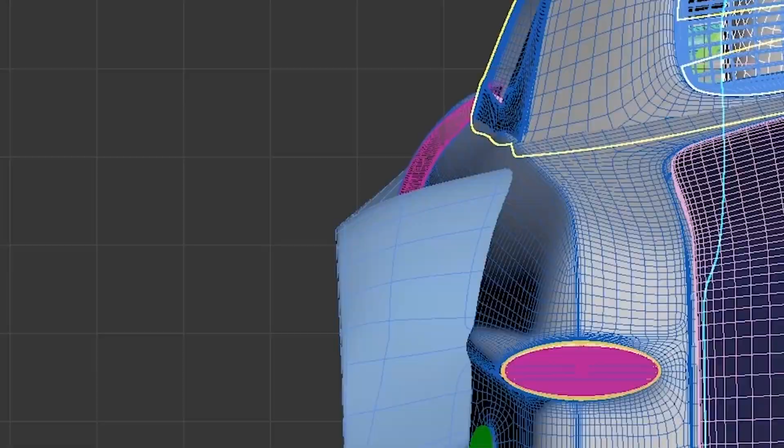All right, we're not gonna work on that one today though. Hi guys, so what's up everybody? We went out and drove this thing yesterday, and it's really running pretty good for the first time ever. Not perfect, but pretty good.

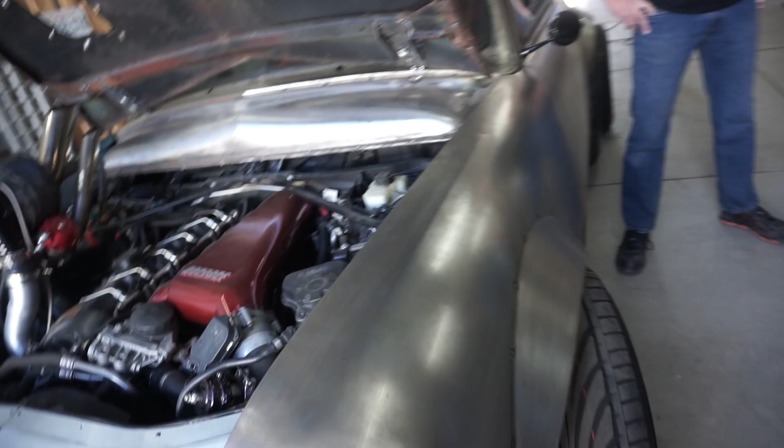What happened though, when I was driving, I finally figured out why the car is so rough. It's loud because it's still bare metal inside, right? Come over here and push down on this right now—we got zero travel on this front suspension. So what I figured out is that our coilovers are cranked all the way down on the front, because we're working through so many other things.

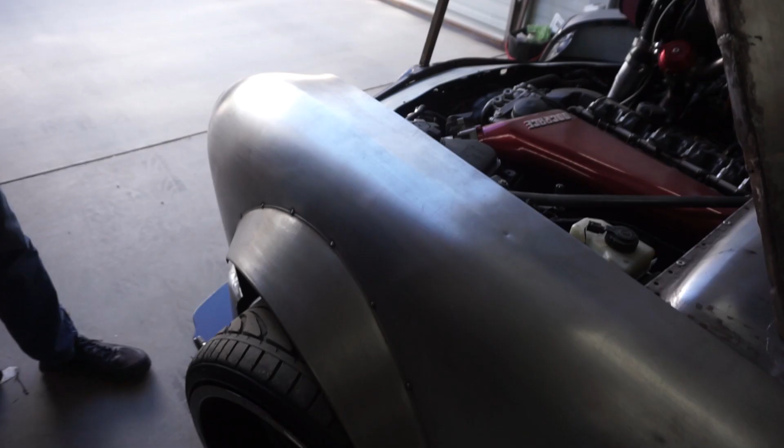Man, that's really dark. I don't know how it's gonna work either because this is not my wide angle. Is this my wide angle? Looks like yours. Yeah, this is my wide angle. Where's your wide angle?

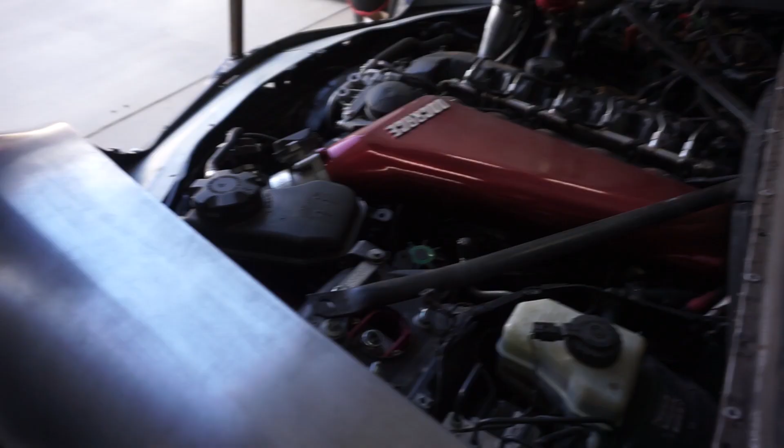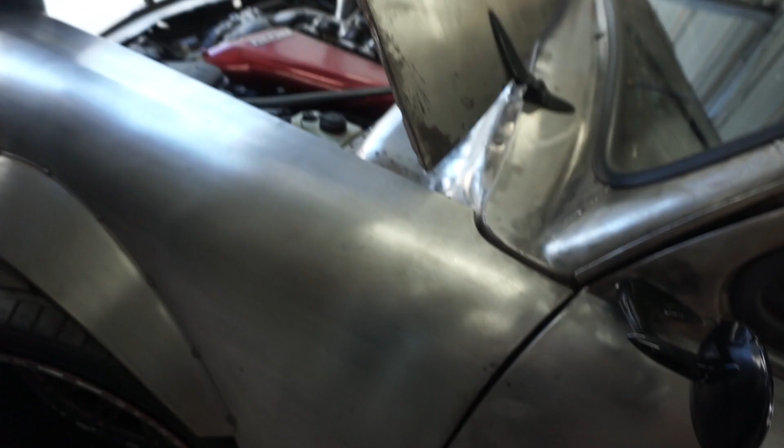I think a few things today—maybe we should tackle that. Unfortunately, the thing to do would be to cut the shock tower and raise it 1 inch, probably maybe 2, and then crank our coils accordingly, and that'll give us our travel back. That's also a way to lower a car more, but we're not really needing to go lower. What it does is you actually lift the coil 1 inch and lift the shock tower 1 inch, and you're still at the same ride height, but now you've got 1 inch of travel. Y'all following? That's pretty cool, actually.

I've done this before on an Astro van where we needed to get it lower and there was just no other way to get it lower, and we were able to do some stuff like this. What will we do after lunch?

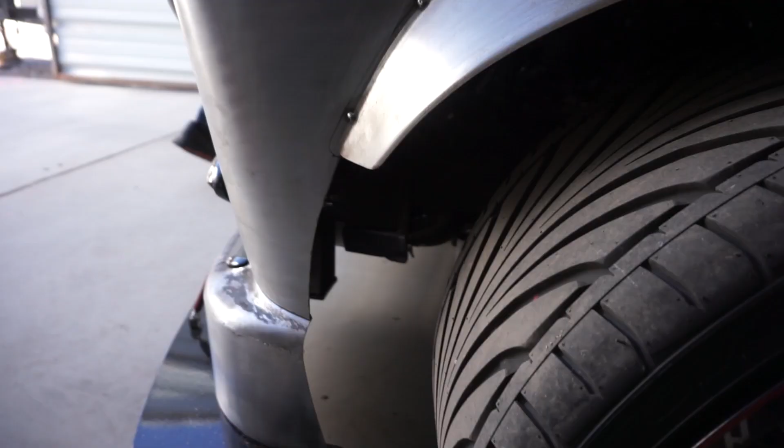All right, and then the other stuff is we finished the rear wheel arch lips, or whatever, the supports. I think we need to work on the front ones now to put the L's in, and I think Ryan's like the pro at that—he can stretch and bend metal like the man of steel that he is. Yeah, so I think we can maybe do that.

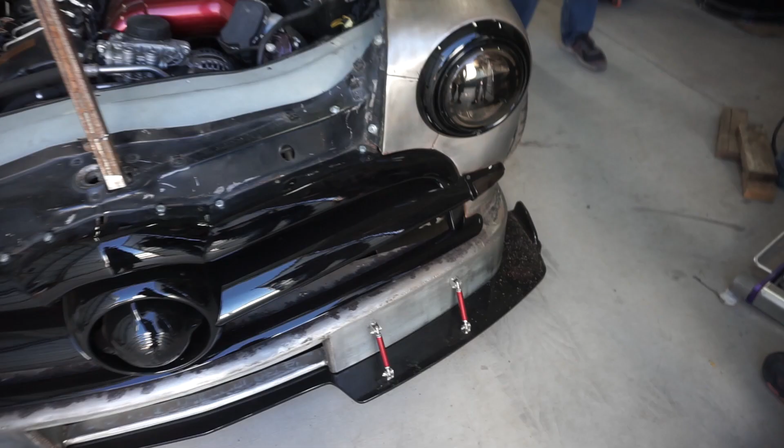Look at the dirt it throws up on the thing. That's crazy. So you borrowed this steering wheel.

I did borrow that steering wheel off your daily driver. Yeah, so I was having an airbag fault, and it's a 2-plug connection, stage 1, stage 2 on the airbag. One of my harnesses was giving me a fault, so I kind of borrowed the other harness out of that one. Oh wait, I thought you gave me the good one, so this is all good and yours is all bad? That's not the case—actually, I have the good harness now. All right, well, and yours is no good.

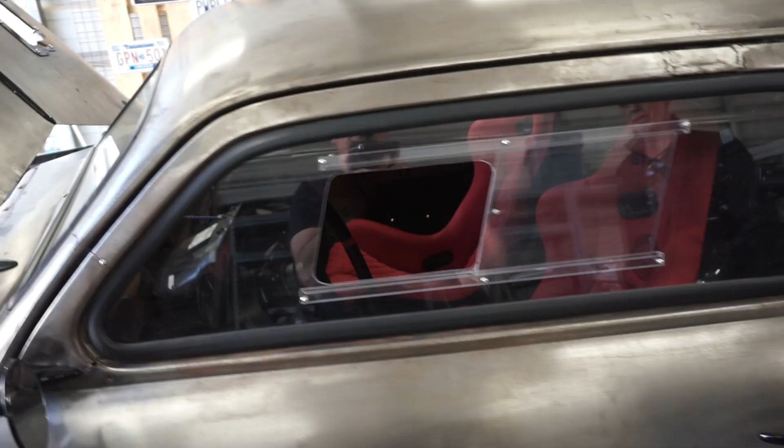I'm just joking. This was our old steering wheel that came off the car. We were never going to use it, except that we're having some weird things going on with the shifting on this—it just doesn't want to go into sport shift. I'm thinking that maybe it's looking for the paddles and doesn't see them. So we're going to try to do that at some point too, but probably not today.

So just trying to kind of figure out how that thing looks. Just from looking at it like this, it almost looks like there's a straight spot here, but once you actually put something up against it, it's pretty rounded. I think they might be able to grind just a little bit of the tip off. But I was more curious to see, since it's been so long that we did this, how do we draw it on there? I want to make sure that it transfers from left to right.

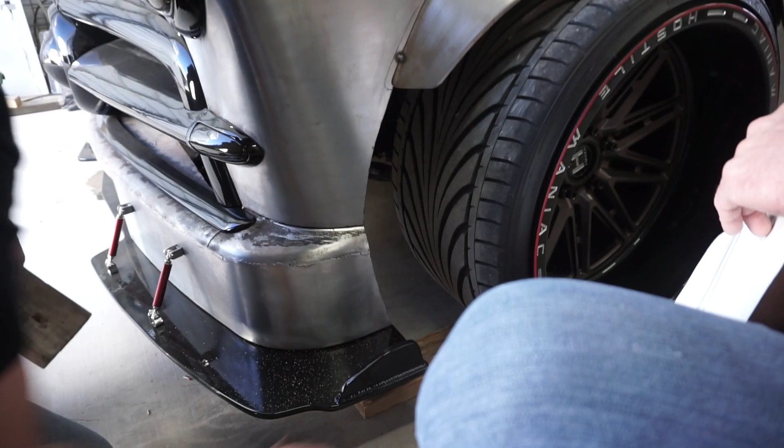What we did on the back is we took the one that was on one side, made it to match, and then basically made the other side. Over here, I think I'd like to explore the option like what you did on the back.

Yeah, we talked about the little triangle, even though this cuts in because of the clearance. There's a lot of room, so I think we can come down here and roll under. Almost need to come in a little bit here just to get the arch.

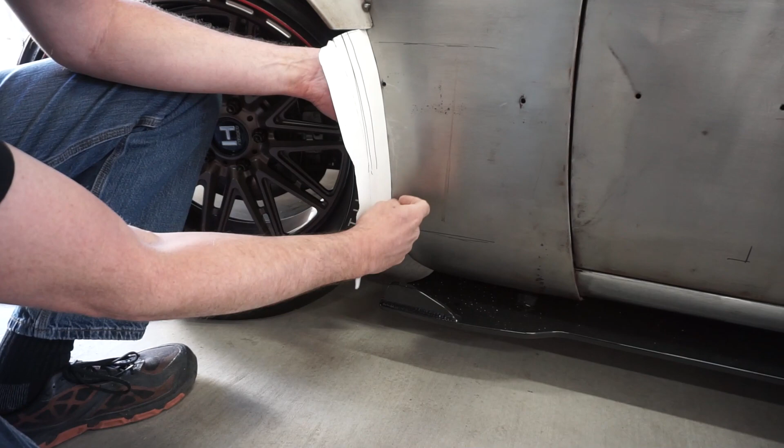You mean it's a little flat right now? Yeah, it's a little flat. When you look at that, it's almost vertical right here. Trim off where this rolls underneath. We can do the little corner flat plate like we did for the back.

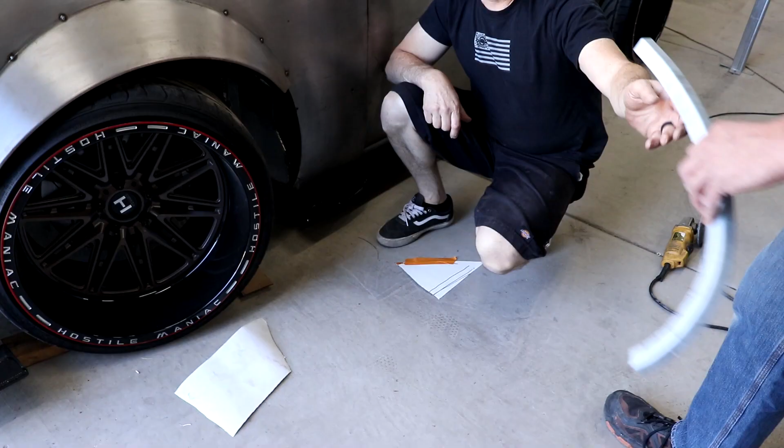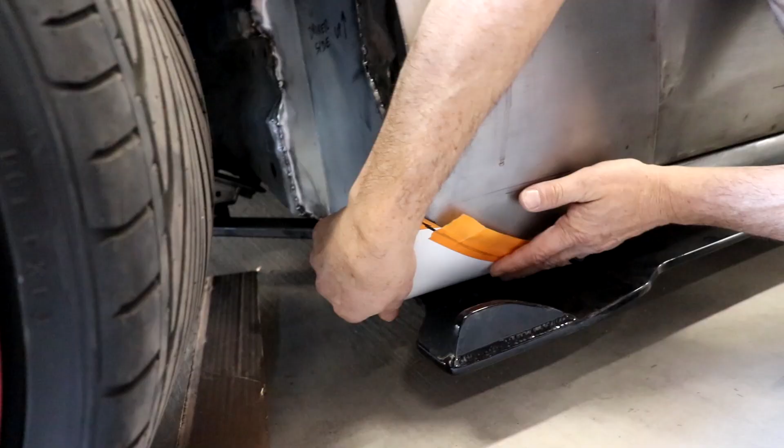What we're gonna make is a piece like this. Oh, we already made it, but that's okay, you guys can go back in time and look at it. So this piece is gonna end up going in here, and it gets welded in, and that's what gives this thing strength. This is gonna be a piece of sheet metal that gets welded on, and that roll is gonna get cut off behind it. So now it creates this really cool visual line that actually returns back the other way. I think it's just really kind of futuristic.

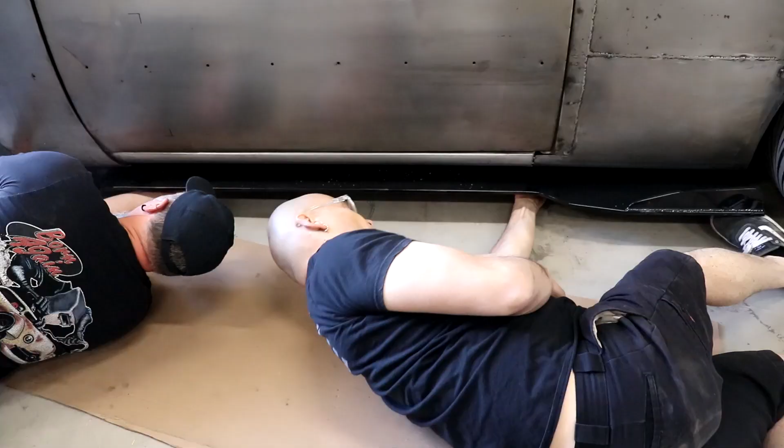We're gonna weld a piece in here, weld that L in here, that's radius, and that's what we're gonna work on today. We're gonna have to drop the side skirt out of the way so we don't hurt it when we do some more cutting there and eventually start welding. I really hate taking it off and back on, and just want to get this car clear coated already and leave these things on, but there's still a lot of welding here we haven't tackled yet.

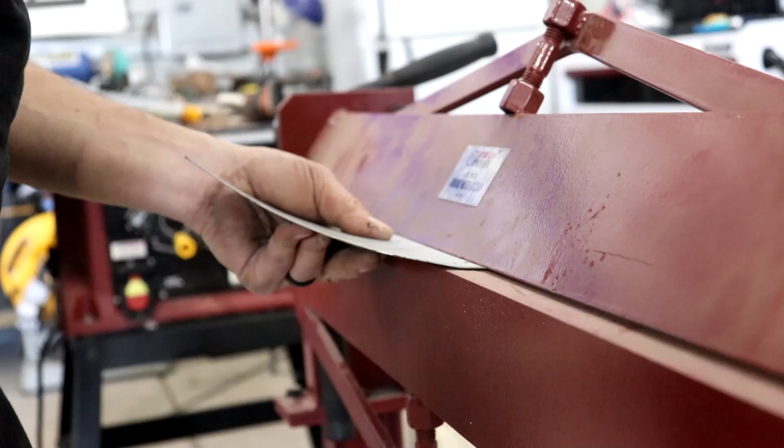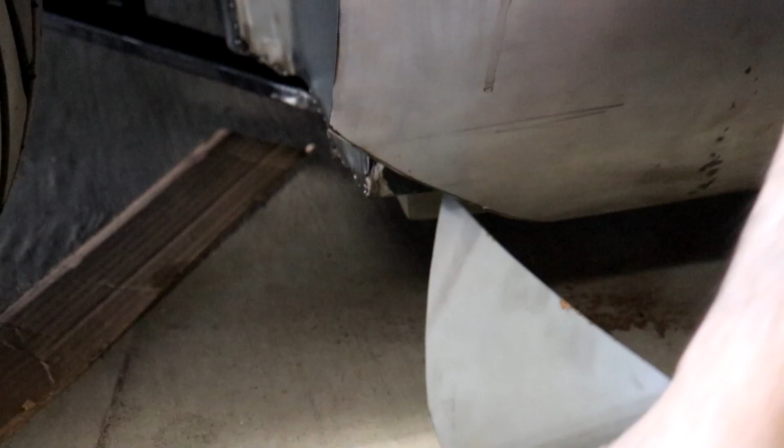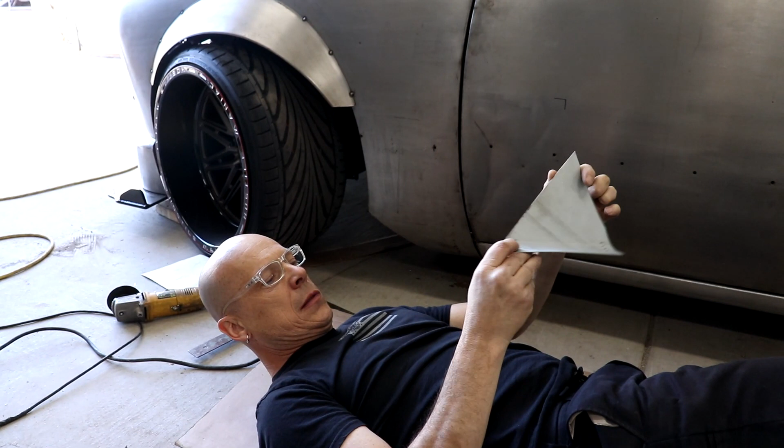Maybe a little flatter here. It's actually working pretty well, pretty good. So just use your hand, use the brake there, a little mallet action to soften it up, and we got our piece.

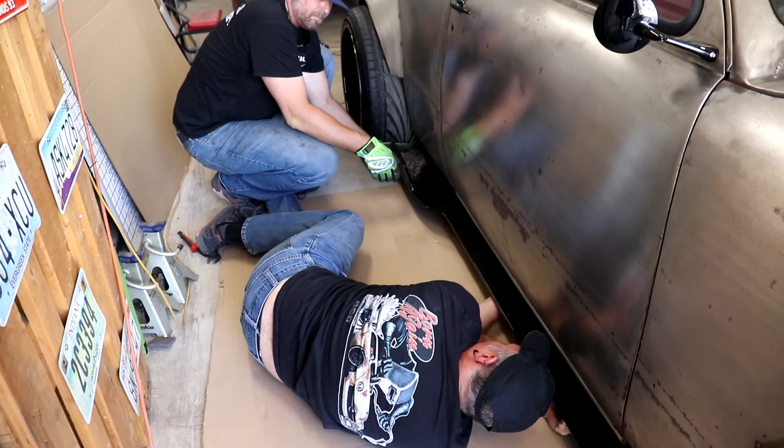Makes it difficult to craft. Man, you're really making this difficult. Yeah, dude, I've never had problems with this truck. Alright, I'll take it. You just set the other one on the trailer. Did he? Yeah. No.

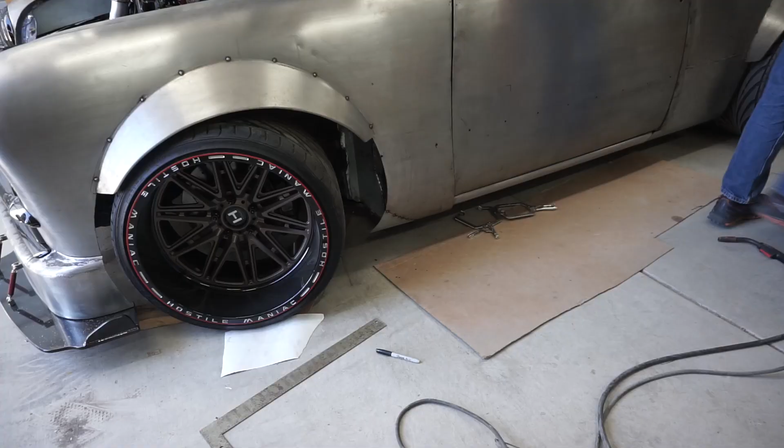So we got quite a bit done with the guys, but everyone had to leave, so we kind of stopped doing that fabrication on the front fender.

In the meantime, I checked my email, and Troy from Fluent Tunes sent me an update based on the logs I'm sending him. So I thought I'd read to you guys what's going on the tuning side of things. He says, honestly, the logs look pretty decent. The things I see that are related to the bogging are fueling related. So fuel trims in the tune are in range now, so the car should be able to make quick adjustments to hit the AFR targets. You also have about 10% fuel trim variance from bank to bank, which is within range.

It also says, in addition, single turbo kits are especially hard on primary O2 sensors, so I may have to do the O2 sensors, although they're still hanging in. This car has 2 sets of O2 sensors, primary and secondary, which I talked about in one of the previous videos. Apparently the primary O2 sensors get hammered pretty hard because they get really hot being right in front of that turbo, so we'll just have to watch that.

Here's the good stuff though. He says, I've attached a revision with more fueling related updates, it's version 4 of the tune. This will improve fuel trims even further so they can have the max available room to add or remove fuel. So it's time to get some proper logs, keep your foot on the pedal to the metal, give me some good logs.

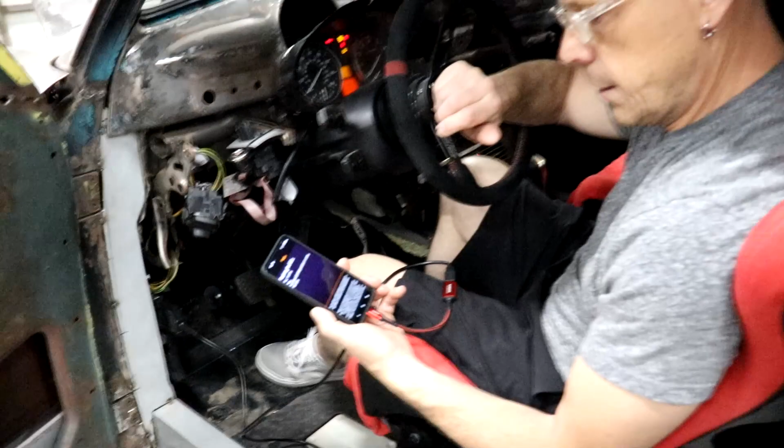So cool. What I'm gonna do is go ahead and load in that version 4 and let's see if we can see anything different. So this is actually loading the new tune into the car, and it's literally just a file that was sent to me via email from England, in fact, because that's where Fluent Tune is.

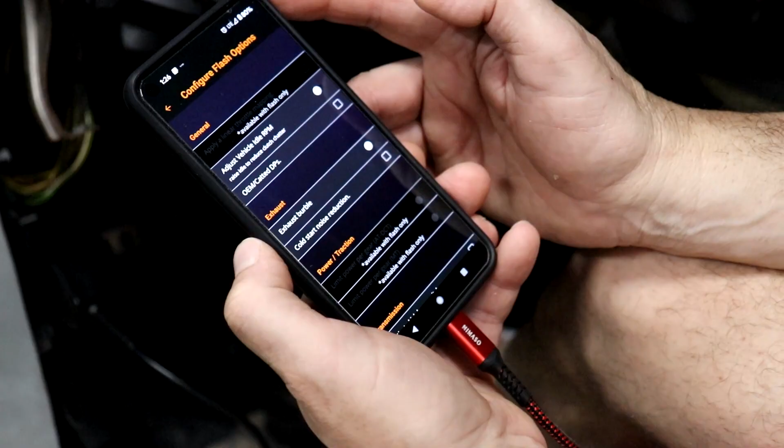Alright, turn off ignition and wait 30 seconds. Alright, so exhaust burble on, cool. Duration, aggressiveness, I don't know, duration, I'm just gonna go to maybe mid. Should I do mid? And we'll try it from mid. Aggressiveness, RPM, alright maybe 3,000. Stock, softer, medium, hard. Let's go to medium. Okay, medium. I think I needed to do that before, so now I'm gonna have to redo this thing.

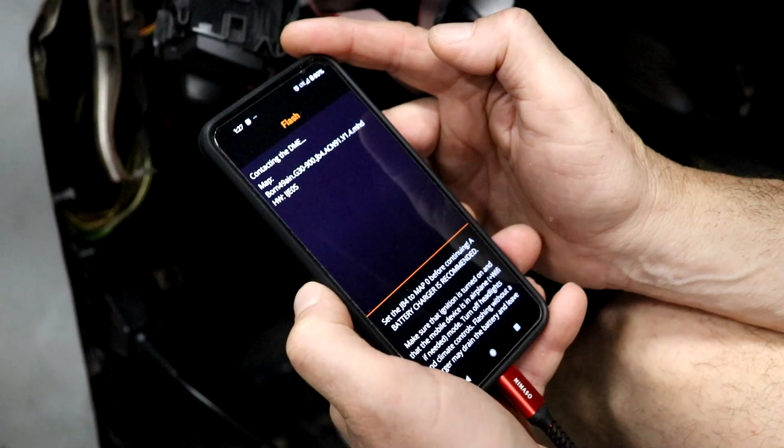Alright, so we're connected, let's go to settings. Maps, we're gonna go to map 1, which is about 11 pounds of boost. Troy did say we could go to map 2 actually and start playing with that, that's 17 pounds of boost. And the maps, apparently you can actually switch on the fly too, so pretty cool. So let's start it up and warm it up a little bit, see if it does some exhaust burbles.